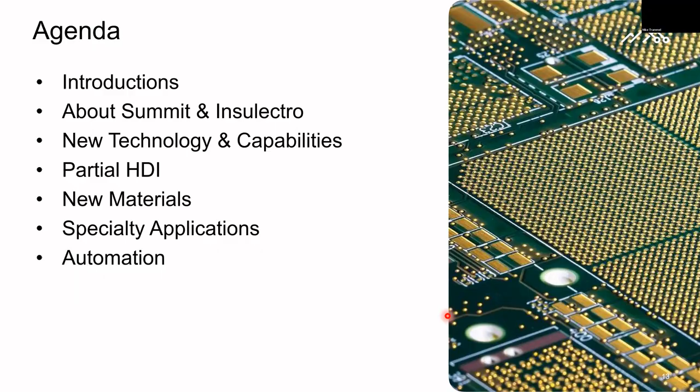So I don't know, Allison or Lisa, if you want to take this one and talk about Summit a little bit. Yeah, I can do this one. So Summit is the largest privately held PCB manufacturer in North America. We have 8 different factories throughout North America. We can support everything from prototype, quick turn, all the way to flight-ready production PCBs. We also provide assembly, and we have pretty much whatever type of design that you can come up with, we have somebody that can support you to help you get that design better and make it manufacturable. And if you need a quote or help with a project, please reach out to us.

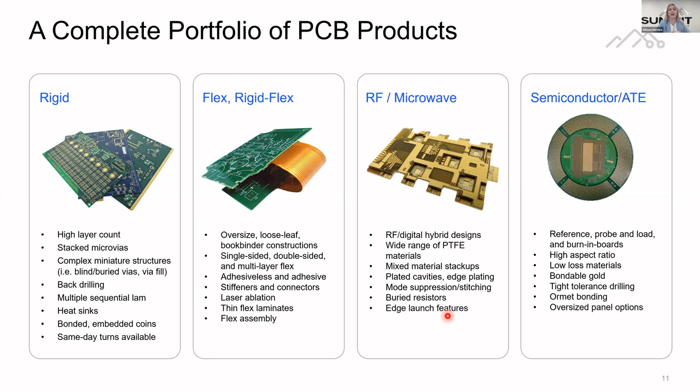So we offer a complete portfolio of PCB products. We offer rigid boards, rigid flex, special materials for RF and microwave, like Rogers, Isola, EMC, a lot of different variety of technology, cavity boards, semiconductor, obviously. So whatever kind of project that you have, if you need a home for that project, we have a facility that will support you.

I'll just take this next one, a little bit about Insulectro. We support fabricators like Summit with everything from materials to equipment, process chemistries, on-site support. We're doing more and more connected factory, which Summit has been one of the pioneers on, where we have chemical process monitoring that goes to the cloud, but also sends real-time data if something goes out of spec. So we're just trying to advance that technology, but we're real excited to be working with Arlon and EMC. They bring a lot of R&D and new materials to the industry that some of we'll be talking about today.

So hopefully we'll find some interesting topics for your PCB needs and designs, and we can advance that. So with HDI and what we call ultra HDI, which is sort of a moving target—in other words, what's HDI today won't be HDI tomorrow. But with some of the things that are coming together, whether it's the low CTE dielectrics, the low loss dielectrics, the new imaging technology, which Mike's going to talk about, plating technology, and of course some of the new photoresists—these things are all converging and opening up some really nice opportunities as we build PCBs.

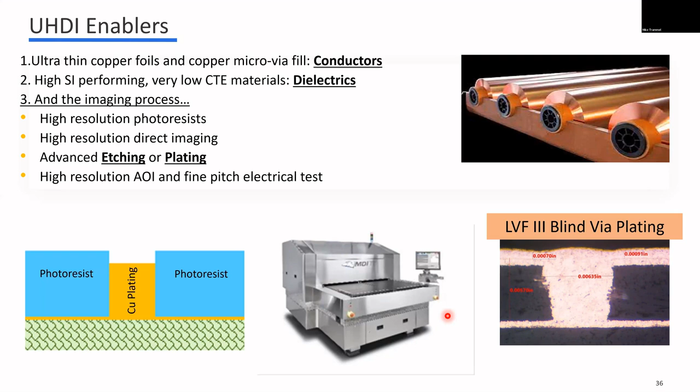So classically, especially on interlayers, we do a subtractive process. Basically, you take a core, you apply a photoresist, and you print and etch. Now, that technology has advanced, and Summit has some new equipment for that. But there's also an opportunity to do what we call semi-additive.

And just to put it in perspective, board shops are doing semi-additive today. Sometimes that gets conflated with substrate technology, but when you're doing outer layers on a PCB, you're starting with a thin foil, you're putting on a photoresist, and you're going to pattern plate holes, vias, and circuits all at the same time. Doing what we're talking about today is just extending that to the next level with some of the new photoresist, equipment, and foils that are available. So really the difference is with semi-additive, you're creating a mold for the plating, whereas subtractive, you're creating a mask for the etching.

And this just shows the outcome. And one of the things you can do with a photoresist that you can't do with chemistry is chemistry can't go through the copper—I mean, it's etching the copper, removing it—but light can go through the photoresist and form a feature that is very, very straight sidewalls, but also can be very, very small depending on the capability of the resist. So you can do things with resist you can't do with copper and etch.

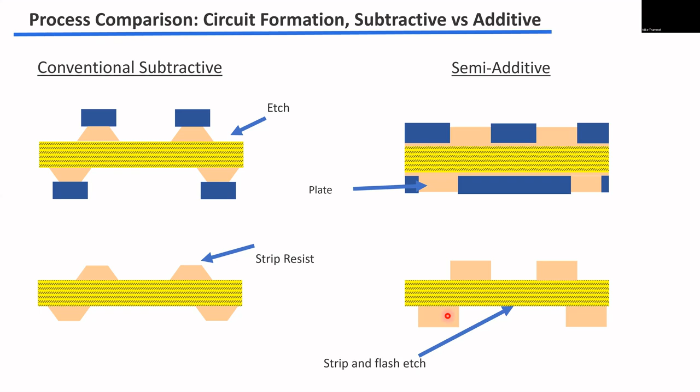So we're going to have a little video right now. Let me see if I can get this to go right. All right, there we go. Talk about some of the new exposure technology.

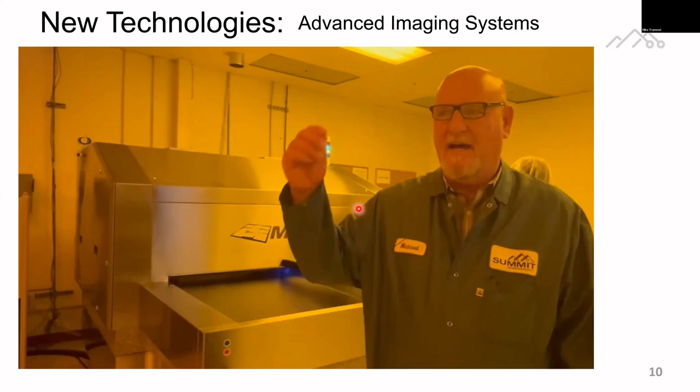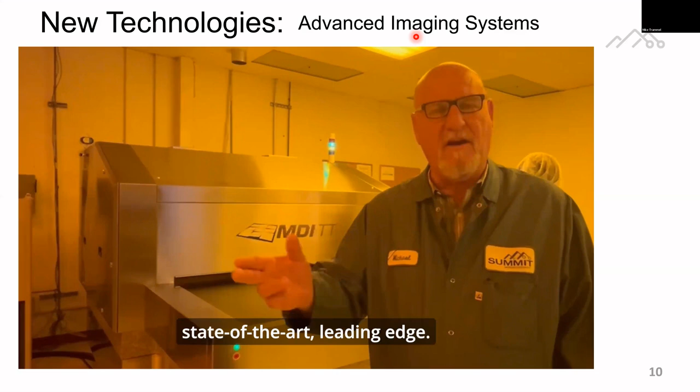Hi, my name is Mike Trammel, Summit Santa Clara. Welcome to Tech Spotlight. Today we're going to be talking about a new imaging system that we brought in, upgrading and displacing some of the older technologies. What you're going to see in the room today is essentially state-of-the-art, leading edge. I'm going to talk a little bit about how this new machine sets apart from one of the older machines I'm going to show you right now.

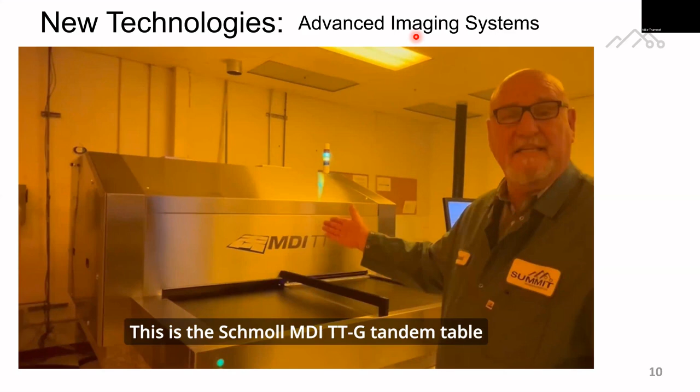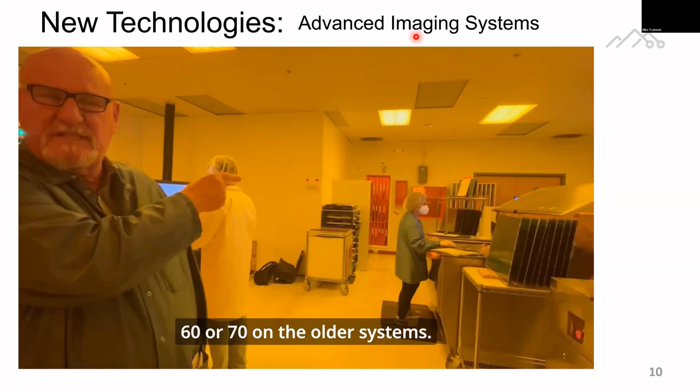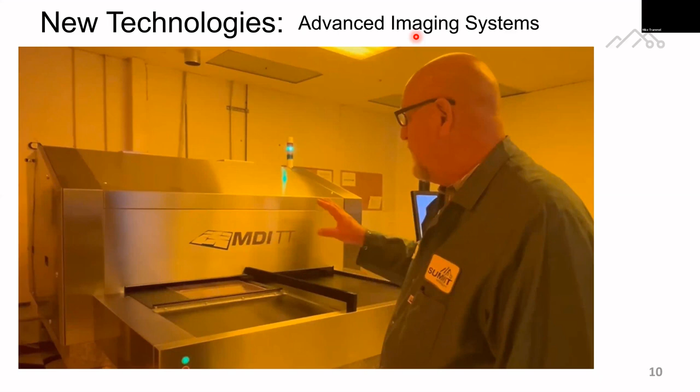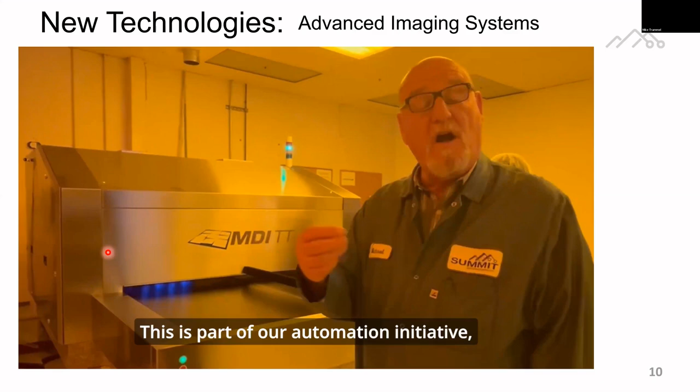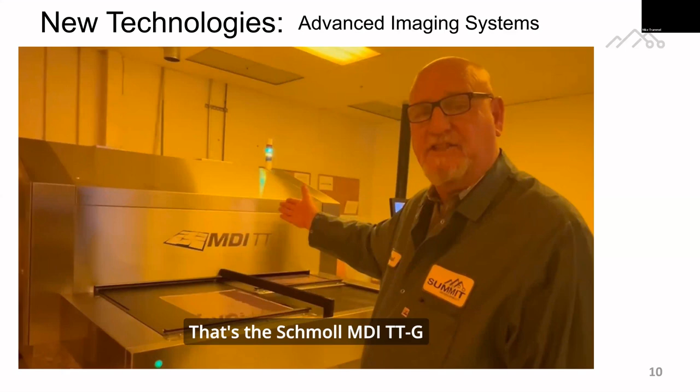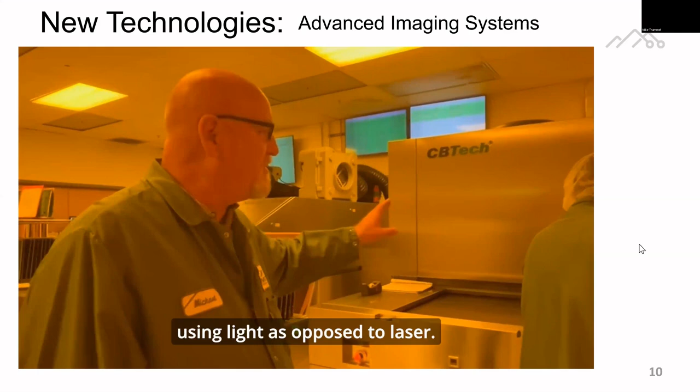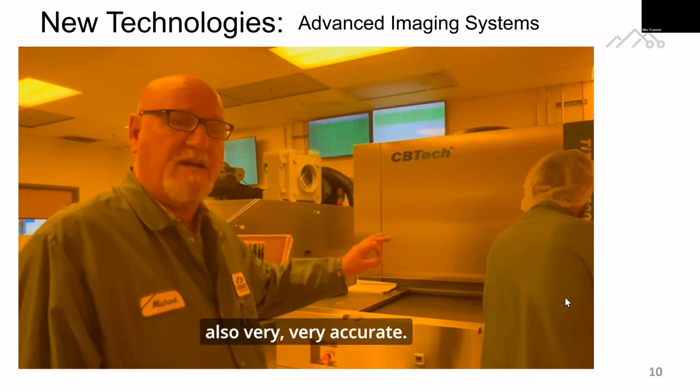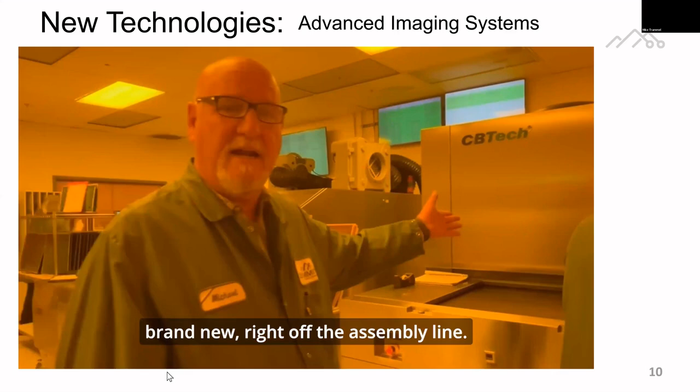So this is the outcome of that equipment. Mike, do you want to talk about that for a sec? Yeah, so it's pretty amazing.

This is using standard dry films. We're actually in the middle of testing, even going past these current stated capabilities. The good news was when we tested, it actually exceeded the stated capabilities, and I think German engineers do that on purpose. They understate and over deliver. But yeah, very, very satisfied. It's met all the requirements from an imaging standpoint, and Chris and I are now working on using some of the higher resolution films that we had qualified on that prior laser technology as opposed to the direct image technology. Pretty excited to see where it goes.

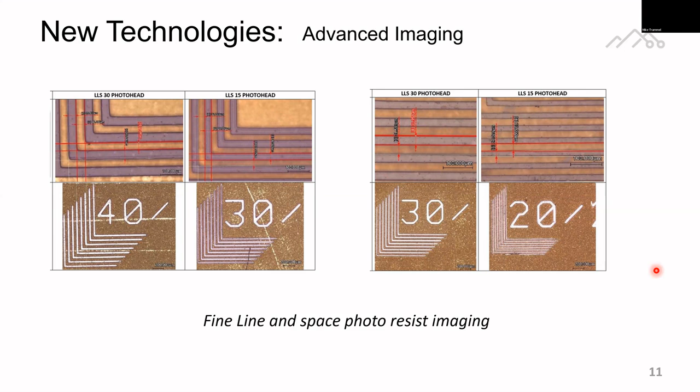But our anticipation is that we're going to be doing 20 micron on a regular basis.

So one of the techniques we use to qualify the imaging process, and that's really to set the exposure and develop of the photoresist, is to tin flash a part. What's nice is we can do this on a sample part, or really any copper clad core, and make sure we have the imaging just right before we actually apply that to the production board. So we tin flash and then strip the resist.

You can see an example here of where we neck down the traces to 25 micron for the BGA fan out. We're going to talk more about that and have a live example coming up in a few slides. But it's a real nice technique to qualify both the exposure unit, the photoresist, and the developing process to make sure everything's just right before you get into production.

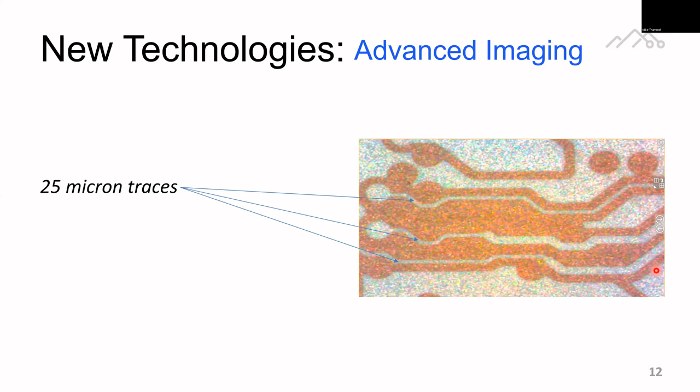I think that's the key, as we implement these new processes, one tends to outrun the other. So I put in new imaging, then I have to put a new develop etch strip to be able to develop and etch that. And then even after that, we need to upgrade our AOI systems to even be able to detect those smaller traces. What we're looking at here is a project that Chris and I worked on together.

This is the new UCE develop etch strip line that we implemented here in Santa Clara. Based on the huge success we saw here, we immediately rolled one out to our Toronto factory. We're cutting a deal for 2 more of these to go into, I believe, our Orange and Hollister facilities to bring that technology to all the shops.

Chris can talk a little bit about the technology, but I'll just state, I'm a numbers guy. I look at data, and I've qualified maybe 40 etchers in my career. I pulled the data using the same spreadsheet and surface mapping that I do for all of them, and I thought I must have dropped a zero. So I completely redid the testing and got the same result. This is essentially 100x better than anything I've ever profiled in my prior career. And that's a lot of etchers.

Chris can talk a little bit about why that's possible and the technology that makes that an enabling technology. So vacuum etching basically puts a vacuum bar right after every spray bar in the etch process. What that does is it prevents the puddling you get from the etch spray solution sitting on the surface. That gets you very consistent etching from the edge to the center of the panel, because if you didn't have that, you'd end up either under etching or over etching certain tracks on the board. And when you're going with finer lines, they all have to be the same.

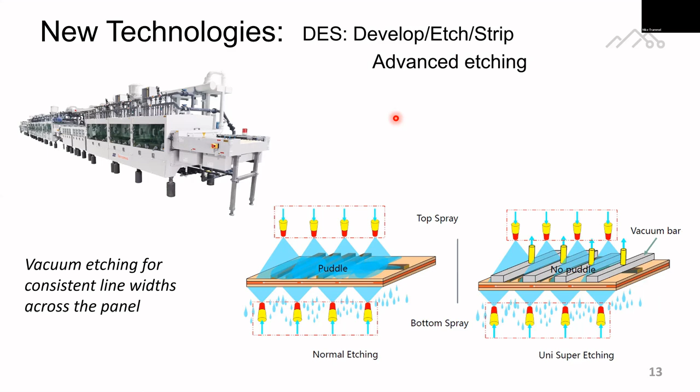Because if you have, let's say, a 12 micron variance in your line width on half ounce copper, that's okay on a 100, 125 micron track. But if you're going down to 50 or 30 microns, to have that 12 micron variation, it's just not viable. So the idea of vacuum etching isn't new. The difference is this is in production, it's here right now, and it's producing, as Mike pointed out, very, very good results.

So copper foils continue to advance. I know copper foil sounds very mundane, but I get a ton of questions on copper foil from the fabricators and even designers and OEMs because they care about things like surface treatment, the RZ topography for high speed. But one of the things we want to talk about today is some of the advancements in carrier foils. Carrier foils have come a long way, and that allows us to make some very thin foils, almost at the level of where you would do substrate technology, where you would do an electroless layer, and then image and do your buildup that way, your electrolytic copper that way.

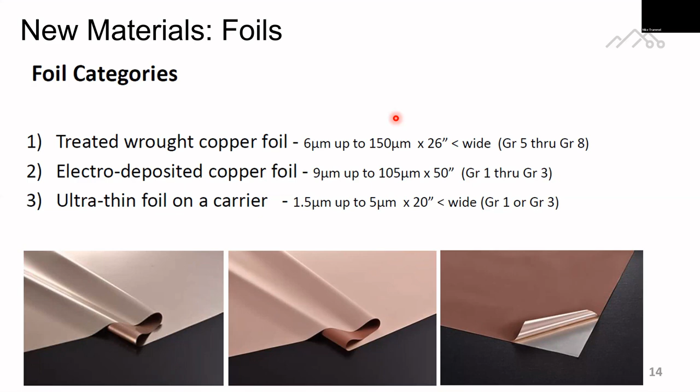What's nice about the carrier foils is it's infinitely scalable. You can do 4 panels or 400 panels, it just doesn't matter. It's just a matter of applying the different foils. As I mentioned, foils have become a big issue. There's a big variety right now, but we have some new foils, some that are very, very smooth for high frequency.

Again, the new carrier system with the release liner or release treatment allows us to do things we couldn't do before. The old carriers were at risk of fusing into the functional foils, so it's very common now to have a 1/2 ounce carrier that you can peel off after lamination.

I know this used to be very simple. You had 2 or 3 choices from a foil standpoint, but don't let it confuse you. Between Chris and I and our pre-engineering team, we're very well versed on the different applications, the possible pitfalls, and the expectations. So if you want to talk about foil and you're not sure, please give one of our pre-engineers a call.

You'll hear terms like HVLP, VLP2, and other terms. They have different meanings from different suppliers, so the IPC has become a little better at specifying it. The new spec, one of our teammates is on the 4562 committee, and these are going to be the new designations for the foils. But even within those designations there is a variety, so as Mike pointed out, that's something we can help with. HVLP might mean 3.1 micron for one supplier, or a maximum of 2 micron for another. That's an area where we can help.

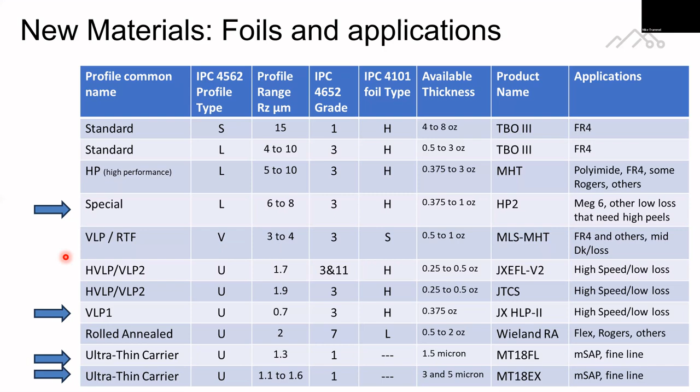As I mentioned, the 1/2 ounce peelable carrier, the release layer technology has improved. It used to be, depending on lamination temperature, if you were at 350 Fahrenheit it was no problem, but as soon as you went above that you risked the foils fusing together and couldn't remove the carrier. Then you'd be stuck with a 1/2 ounce plus instead of the ultra thin foil you wanted. But we do stock 1.5, 3, and 5 micron, and coming up we have an example of what the 5 micron could do for you in an advanced design.

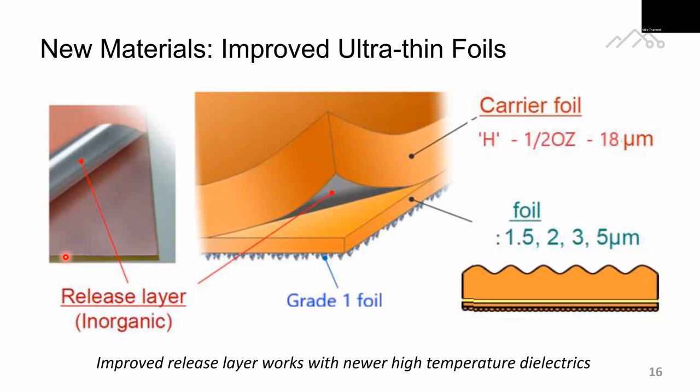Some images here of a 1 millimeter pitch and a 0.8 millimeter pitch. One of the things we'd like to talk about is partial or part-time HDI, where you're not trying to build a substrate, you're doing a PCB. It might be an advanced PCB, but it has a BGA with a footprint that might be something less than what we're normally used to.

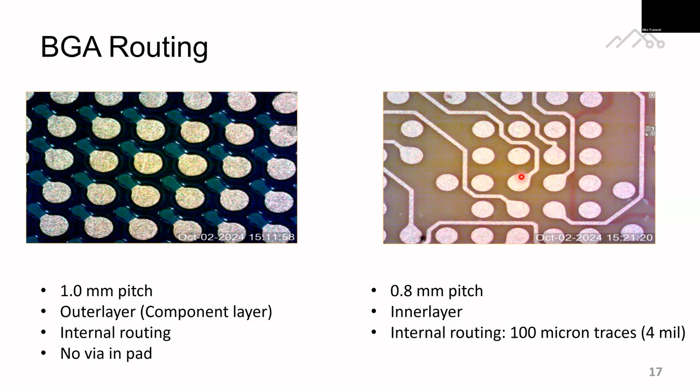One of the things you can do is neck down that trace. Two examples here: all the routing's internal in this one, there's no via-in-pad. In this one you have a 0.8 millimeter pitch with 4 mil, or 100 micron, traces, pretty standard for a BGA route or fan out on the inner layer. But this does open up opportunities where you can neck down the circuits without really a loss in transmission line performance, as long as that neck down is short.

The rule of thumb is as long as it's less than 1/4 of the rise time, you can do that neck down in the BGA fan out, where the rest of the board is conventional density, but you have that ultra high density just in the BGA area. This is where it takes that very specific equipment set and standard etching technology just can't maintain that neck down. You end up, to get your standard trace widths to the correct width, over etching because of the distribution of the etch. You end up over etching those neck downs.

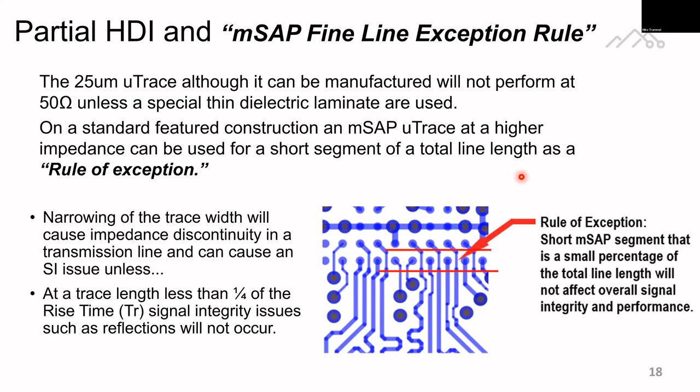And this technology can be extended even further than this. It's a combination of the photoresist, the exposure unit, the etch capability, and of course the rest of the processes. When you're doing multiple layers like this, let's say a sequential lamination buildup, that's where the dielectric materials become important, because they have to have the right properties to make all this work.

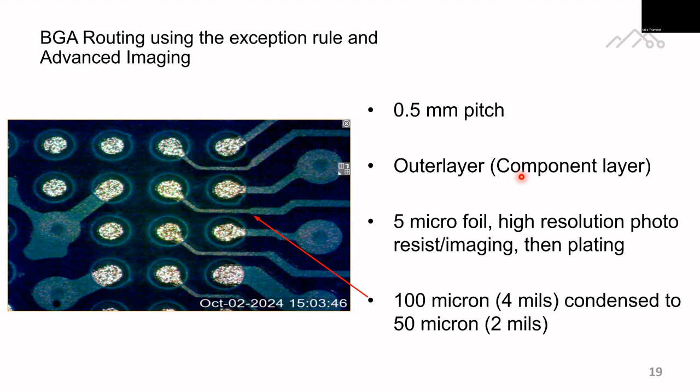So as I mentioned earlier, we're really excited to be working with EMC and Arlon. They have an extensive R&D department, and they're really focusing not only on the speed of the transmission line properties of the materials, but really focused on making sure the CTE is low. So when you have bulk resin areas filling in between these traces, you get the right type of reliability. So Chris, in case there's entry level people, can you explain what CTE is?

Yeah, coefficient of thermal expansion. So PCB materials, especially rigid PCB materials a bit more than flex, are composite materials. And the coefficient of thermal expansion is usually measured or rated on the material based on its glass and resin combination. What can happen in some of these advanced designs is you can have areas with a lot of bulk resin, and that's where the resin of the pre-preg or laminate has to have the right properties.

And that's where we're starting to push the standard design limitations of the past, where your best feature or architecture would be single micro via stagger, single micro via stagger, and then we move to one micro via stacked onto another, then over, and then repeat, rinse and repeat.

But now we also have a software program where we can actually test the capability. It's called Gauss. So we do these Gaussian analyses, and it's like things we thought we'd never do, like a 10 lamination cycle board with micro vias in it. In the past, that's just a no bid. But now we're actually seeing and building these. And again, it's all because we're using these new advanced materials that not only have the high speed electrical properties you're looking for, but the low CTE allows us to make these smaller packages a reality.

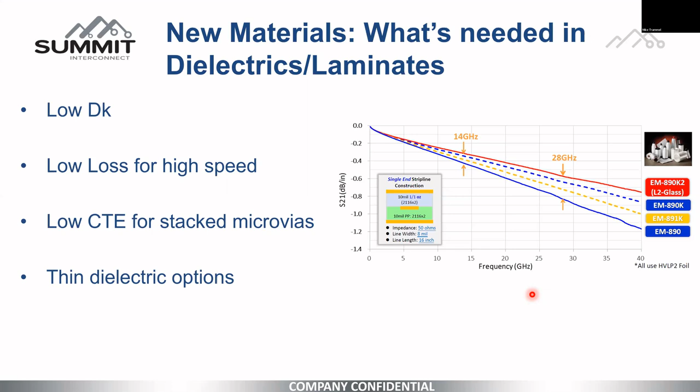So these are some of the new materials that we offer. And I do want to point out that Summit's run all of these. Four out of five of these, I would say, are qualified, and one's been run with normal results but just hasn't been run in a larger way. And that's the 892K. That's a relatively new material compared to the others. While Summit's run it, they haven't run a ton of it, but the other materials they have experience with.

So what's the big difference between 890 and 892K? I know it's for them. Yeah, so it's lower loss. It's even lower in loss, and it's lower in Z-axis CTE. So it's just an improvement over the 890K. The K designation for the EMC materials designates low Dk glass.

So if you need that 3.0 Dk space where you're trying to build a PCB that might have been on a fluoropolymer system, a Teflon type system, you could use these materials because they'll match both the DK and DF, or the dielectric constant and loss tangent. Yeah, and that's not necessarily just the EMC products, but there's other FR4 or reinforced fiberglass type materials out there that are now chasing the same electrical properties as Teflon.

And from a cost standpoint, you're just going to get a higher yield. You don't have all the— we won't go into it too deeply, but Teflon's very, very difficult to process internally. Nothing sticks to Teflon. So again, if you don't need that extreme electrical property requirement of Teflon, and if these numbers work for you, we strongly recommend you move to this type of material. It just makes the build so much easier.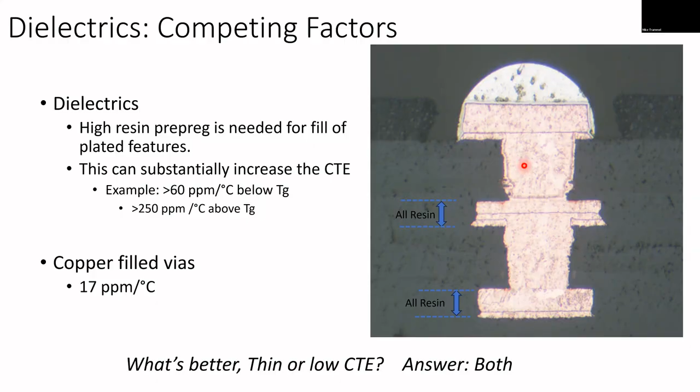Here's some good examples. This is a filled system, you can see the filler particles in it, and the fiberglass fabric has basically tented or bridged the copper areas. Wherever you have copper circuits, you're going to have what we call neat resin. Here's an example of an unfilled system, but you get the idea - you end up with a lot of this resin.

Now if you're stacking vias and electroplating each layer to fill your blind vias, you're going to end up with relatively tall copper structures where you'll have a lot of bulk resin in those areas. Something not really covered in this presentation - mechanical drilling - as these filled materials came into market, we had to develop very specific drilling parameters for these. It took a little engineering, but that's been overcome. This is essentially standard product for us today with our new drill systems.

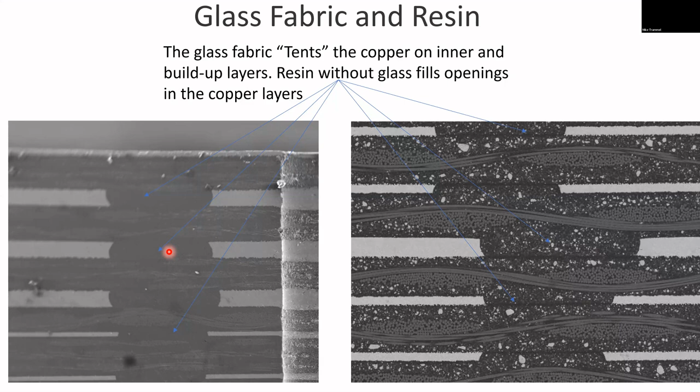EM370Z is one of the new materials I talked about. It can be used for everything from thick copper to stacked vias. It's an epoxy system, very economical, not necessarily a low loss system, but it is lower loss than the phenolic cured epoxies. Phenolic cured epoxies became very popular when lead-free assembly for commercial took hold in the industry around 2006 - phenolic cured systems were a way to get FR4 to meet the new lead-free temperatures. The 370Z is not a phenolic system, it's an epoxy system, but it's an upgrade from the phenolic systems, and it can be hybridized with the low loss systems.

I just want to make a comment - for you designers out there, that picture is an example. From a design standpoint we can build that, but you really don't want to do three microvias stacked on top of a thermal like that. Now we are doing 3 stacked vias passing to us with this new material, but we would still discourage you from stacking right on top of that. This was a test vehicle just to see the limits of the material.

370Z is great for high voltage, great for electric vehicles. It's an economical, high reliability FR4 system. It's even being evaluated because it's halogen free - the burn products are being evaluated to see if they're lower toxicity for things like aircraft cockpits, areas where if you had a circuit overload you don't want to create any nasty fumes. That's actually being tested by an OEM. To be clear, that structure did pass the IR reflow 260C times 10 cycles, so not saying we can't do it, but we do have ways to test your designs.

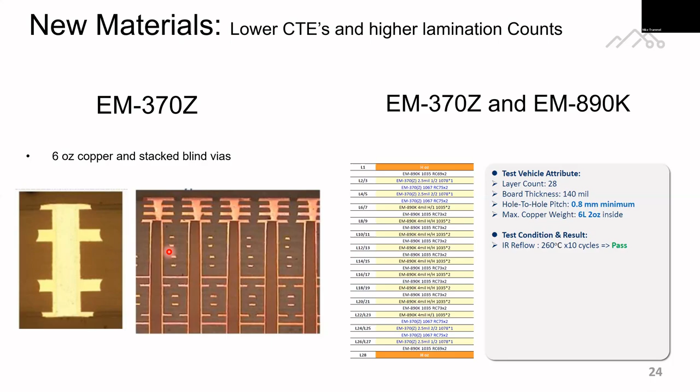So just a little bit more about the new 86HP. It's a new material, a polyimide that has some advanced filler and chemistry technology, where the DK and DF have been reduced over standard polyimide, but it has a very, very low coefficient of thermal expansion, not just in the Z-axis, but also in the X and Y.

Some examples of what you can do with the material, whether it's an ultra thin HDI buildup, or something more conventional with four stacked vias over a 14 core. These thinner prepreg offerings, relatively new to the industry, are another one of the enabling technologies. First you have to have a factory capable of handling that thinner material, and also learning the fill characteristics and scaling characteristics. That's something any factory needs to get under their belt before they can even consider structures like that 7+2+7 structure you see on the left hand there.

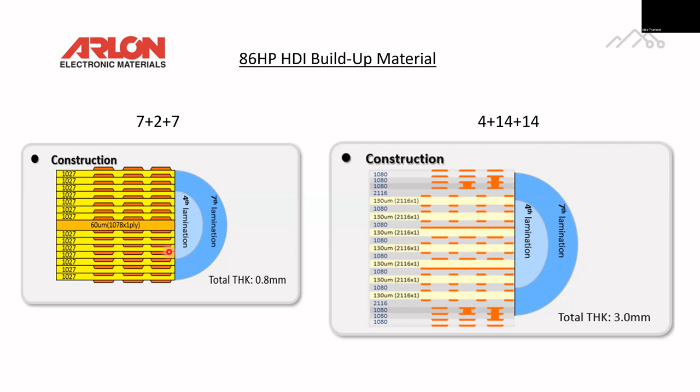Automation and thin core handling is very, very important for that. Just some examples of the 86HP, some structures that can be built with it, whether it's a buried via or stacked vias, and then of course the thermal reliability after some exposure, whether it's cycling or reflow cycles.

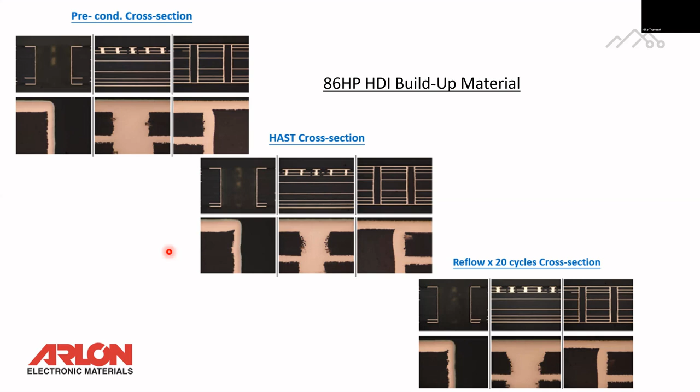So for some of the advanced HDI, there are some films out there that have been used, but what we're finding is that fabricators are very used to dealing with prepreg, the glass reinforced prepreg. We now have offerings of prepregs that are in the film range in terms of thinness, and you could use these in combination with the more standard building blocks to build some advanced stacked via HDI boards.

This goes back to the technology where, if anyone's familiar with prepreg manufacturing techniques and laminate manufacturing techniques, you know what it's like to handle half mil fiberglass fabric. It takes advanced treaters to be able to do that. But it's something fabricators are comfortable with, they're used to this kind of technology. They're not having to work with some of the films that aren't reinforced, that need a carrier all the way through the process. This is much more conventional, just more advanced.

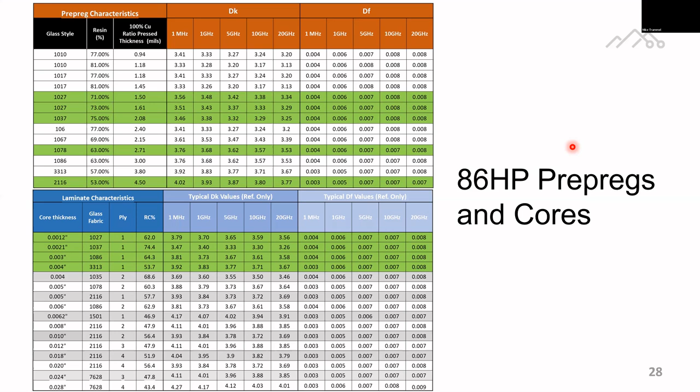So now that we've moved into these new advanced technologies, how do you know that it's actually working? Something that's been developed through IPC, specifically by the conductor analysis group, is OM testing, or D-coupon testing. So if you're just venturing into some of these newer design aspects and you really want to qualify a design, we strongly recommend D-coupon testing.

It will vet your design and your material selection and flow selection. Now you guys can do this in-house, right? Yeah, we have OM testers in several of our facilities, we do this in-house, and that's the nice thing too. If you're dealing with a supplier that doesn't do this, you might want to consider another supplier. Only because we don't have to just say that we're good, we have empirical data based on this D-coupon testing that shows our structures are very, very viable and strong.

It also vets your design. So if you have a very specific design that's pushing the limits, we can model it using Gaussian, and then we can prove it out. And you've had good correlation with that simulation software to the OM results, right? So far, so good.

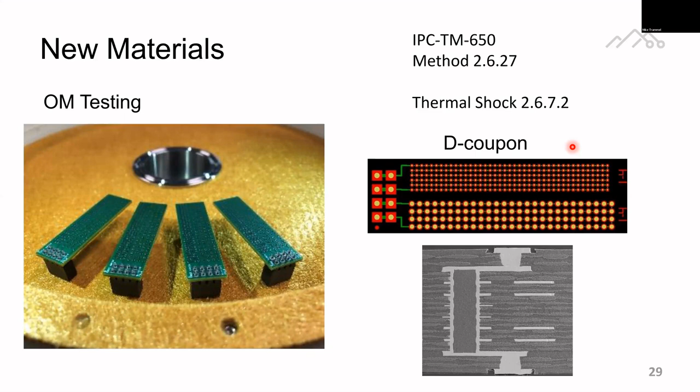We're going to talk a little bit about embedded resistors. I think there's only one supplier now, Ohmega-Ply bought Ticer, right? Right. So there's two technologies. One is to use a nickel phos film on the backside of copper foil. Another technology uses various alloys that are sputtered onto the backside of copper foil. That copper foil is then laminated, and then you selectively etch and strip. The primary sputtered alloy is nickel chromium, but they do have some other resistor value films that produce higher ohms per square.

Yeah, and again, I have engineers that are well versed in this process. Again, we follow the standard. There's a very basic design guideline on how to build these. If you have a specification or you want to specify embedded resistors or any embedded passive, we do have a whole design group, we build these at several shops, and we're well versed in this technology as well.

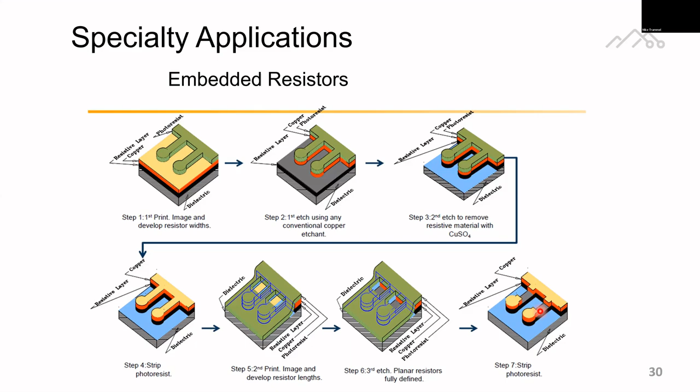And then this is what a panel might look like. This, of course, is a test panel, but it has a lot of different examples. You could see this large resistor.

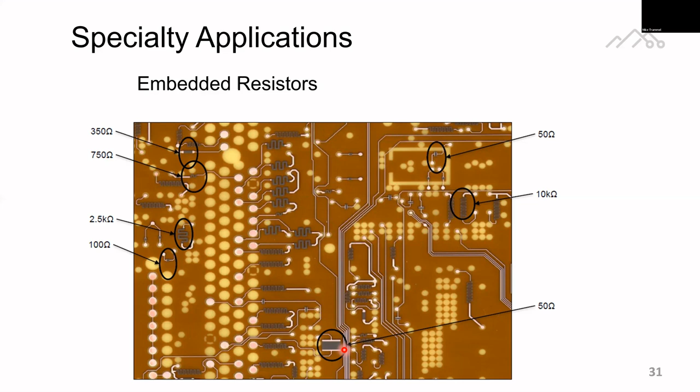They like to say that the resistor material is dimensionless. In other words, if it's ohm per square, it could be anything you want. But if the width and the length are equal, you're going to get whatever that ohm per square is. So let's just say, for instance, it's 100 ohms per square. If I make the width twice the length, then it's going to be 50 ohms, I'm going to cut the resistance in half. If I make the length twice the width, I'm going to double the resistance, and so on and so forth. And if you get stuck on doing the math, we'll be happy to help you with it.

So Ormet paste is a way to join layers in the z-axis. It's also been used for embedded components because once the paste is sintered, it doesn't remelt.

But it is a way to create z-axis interconnects. The paste has some unique properties. It melts at one temperature, and then once it forms a new alloy, the new melting point's much higher. So the initial melt starts at like 130 Celsius. We like to process at 190, but once that alloy is formed, the new melting point, one phase is 415 Celsius, the other is 650. So it just opens up some different technology possibilities in either bonding layers together or bonding subs together.

And we've got several of our shops qualified for this specialty application. But we actually have an Ormet center, or paste center. No pun intended. You can tell what sintering is, right? So this sintering paste, so you have a center. Yeah, sinter center, but that's down in Orange County. We have a full workshop dedicated just to this technology.

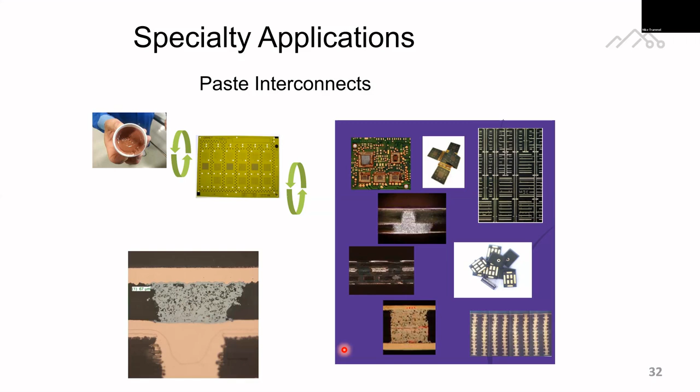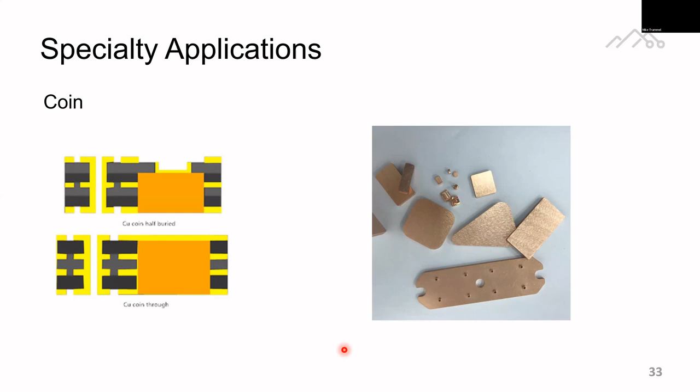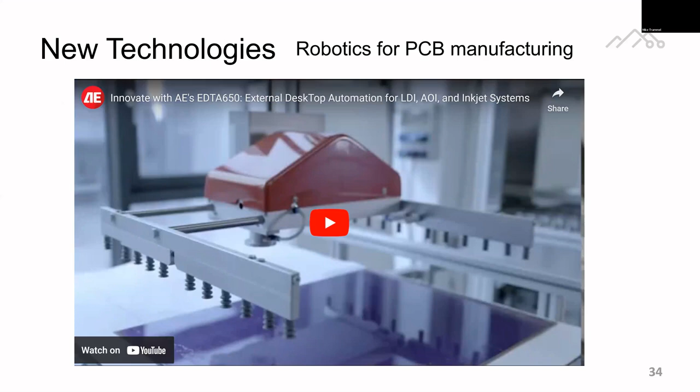All right, we're going to just wrap up with some automation. So as I stated, we've got an automation initiative. The next time you see that video that we began with, we're going to have a full set of robots.

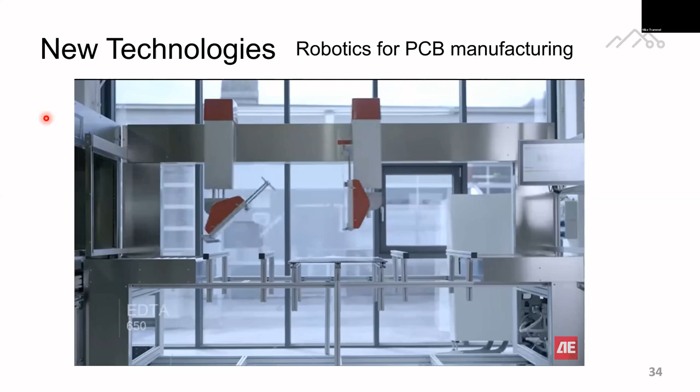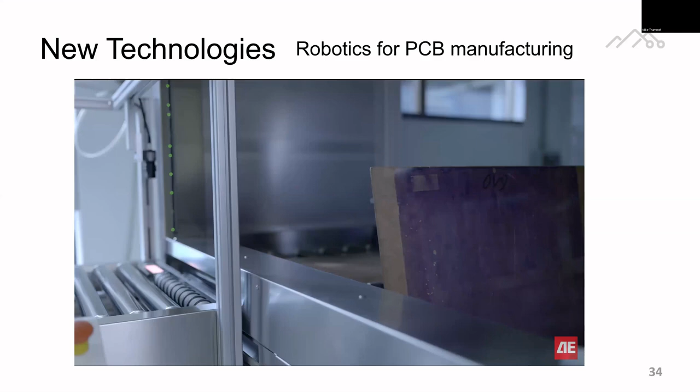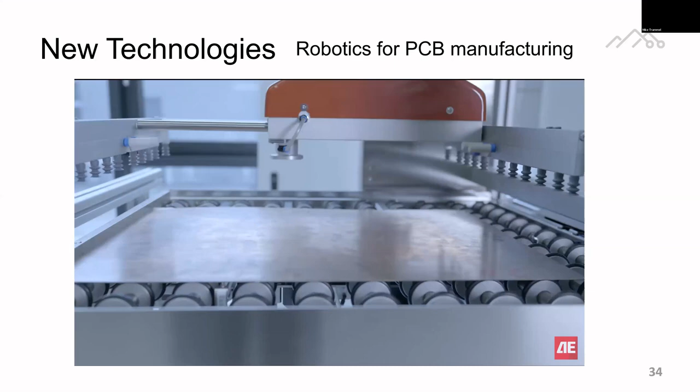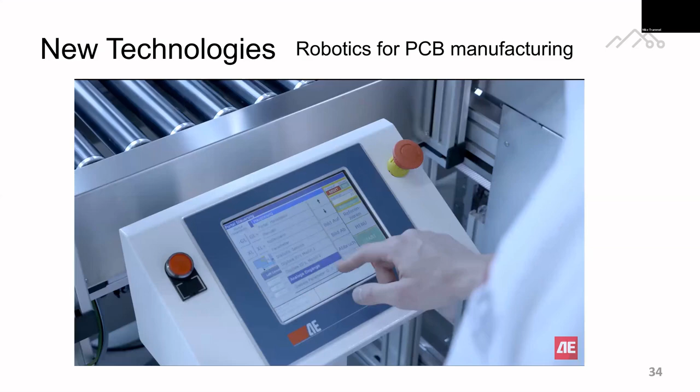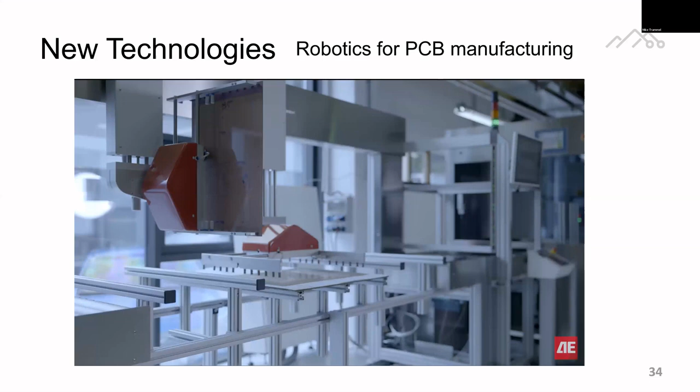Multi-batch and multi-format handling is integrated through an automatic gripper, which allows the recognition of various panel sizes. All settings can be saved as recipes for quick access and reenactment at a later time. Due to the sleek design, unlimited access is granted to all machines for easy maintenance. The EDTA 650 is the fastest system of its kind on the market, operating at a cycle time down to 10 seconds per side. It has a uniquely small footprint and only consumes 800 watts.

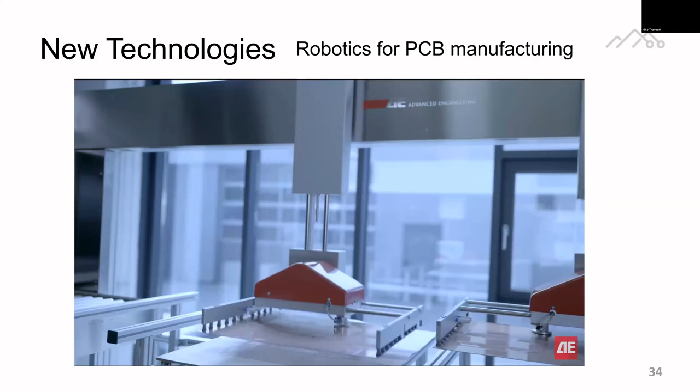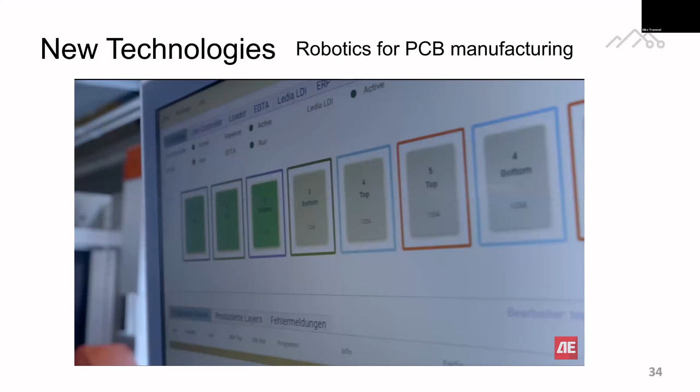This automation is compatible with most LDI, AOI, and inkjet systems, and can be linked to a manufacturing execution system, allowing traceability and unique handling per PCB. The EDTA is a valuable addition towards fully automated manufacturing.

So as stated, we've got an automation initiative here at two other factories. And again, next, if you join us in a future webinar, we'll spotlight that automation system on that same Schmoll TTG unit, all the way from pre-clean through coat, all the way through the development strip line that we showed. So it's going to be a no-touch from beginning to end. Yeah, so as we mentioned at the start, again, materials, equipment, the needs for BGA fan out and tighter pitch, these are all kind of converging.